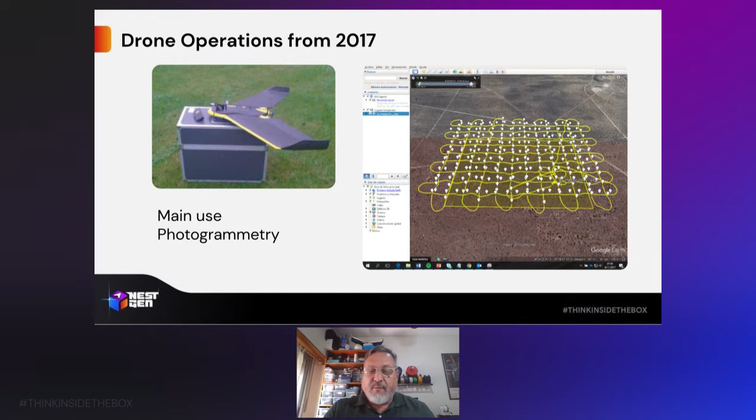We separate the type of work into three types: those that can be periodic, meaning you do them every day or every week in a repeated pattern; those for specially defined works, for example surveys of terrains, roads, and terrain movements; and those triggered by one event, for example surveillance.

When you have some specified problem, you get an alert, and the drone goes to that place, normally to perform some surveillance task.

If we go to the periodic part, that is the most intensive, we have pipeline inspections. Before, we need to check that along the pipeline there are no persons, construction, houses, or installations, because if the pipeline has some kind of problem, that can have civil consequences, and that will be a problem with the law, right?

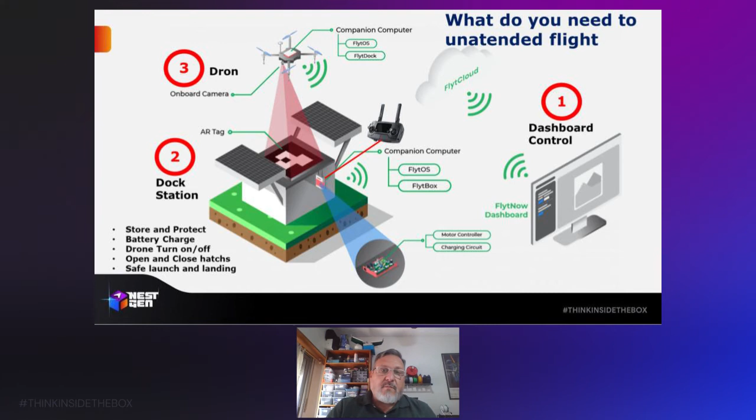This is the hardware we chose to make the inspections: the Mavic 2 Enterprise Advanced. The main reason we chose the Advanced is because it has an RGB camera with a big zoom that would allow us to make the inspection without having to get so close to the installation.

It has a thermal camera that is important for us. And most importantly, it has an RTK module that allows us to make the flights safer, with centimetrical precision in the flight.

These are the dock stations we considered. In the first place, we considered the Heisha dock station. It's a very well done piece of equipment, rugged, but our bosses are a bit worried about the use of modified batteries.

Because we lose the warranty and there are possible problems with the modified battery itself. So we are considering Hextronics equipment that has a battery swap mechanism using unmodified batteries. We think the tests are good, so we are going for this solution.

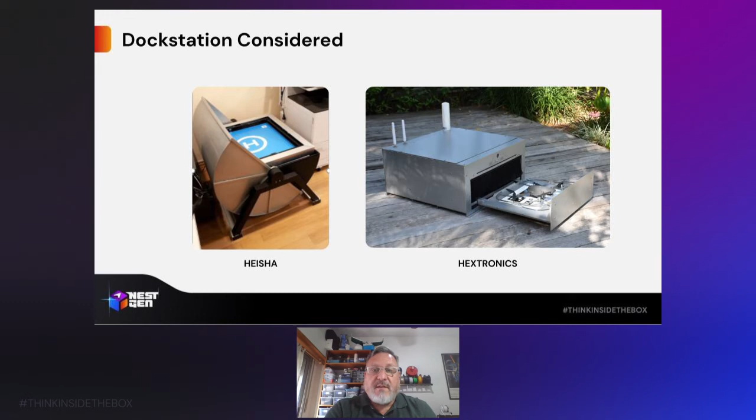This is the test we made with the FlytNow application. I won't show you the whole video because it's too extensive, but you can see in the middle the waypoints we set to inspect.

Our idea is to use the system for two reasons: one, to make the inspection not just at this point, but in another place too. And when the drone is not used to make inspections, use it for surveillance purposes.

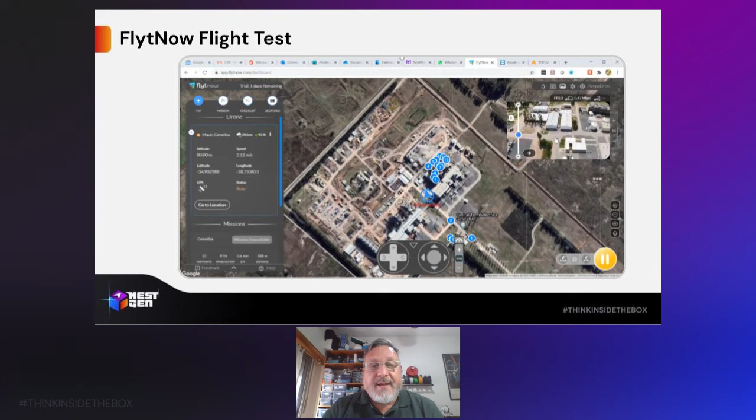The idea is to make perimeter surveys for surveillance purposes. Sorry, I forgot the word - surveillance.

This is the path we are trying to have the drone conduct. As you can see, the drone should make a lateral displacement with the camera pointing forward. That is a function we don't have yet in FlytNow, but FlytBase is developing it, so you can make a round trip around the installation with the camera always pointing forward.

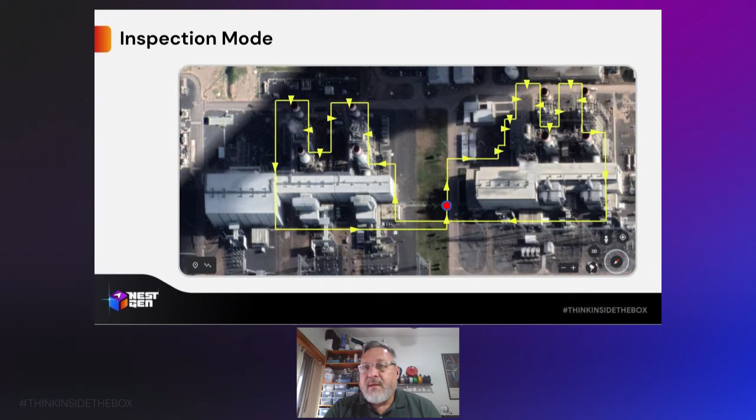We hope in the near future we can finish this project. At this moment, we are trying to decide which kind of dock station we will use, and making a survey of all the inspection points we need in order to make the flight plan.

So, this is our project, and we're expecting to move forward to finish the next steps.